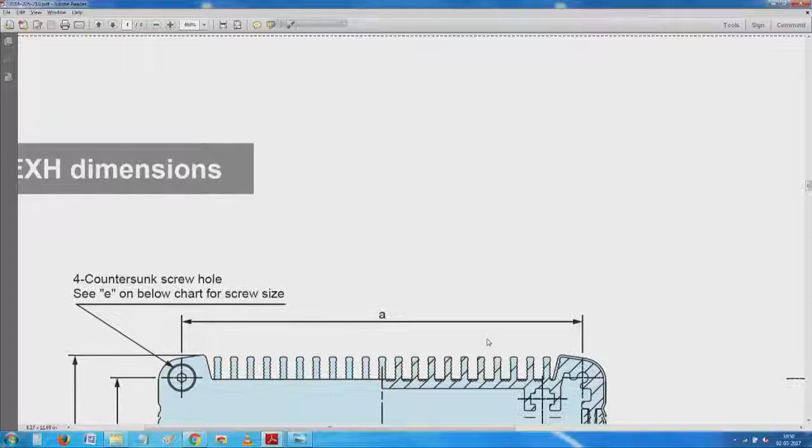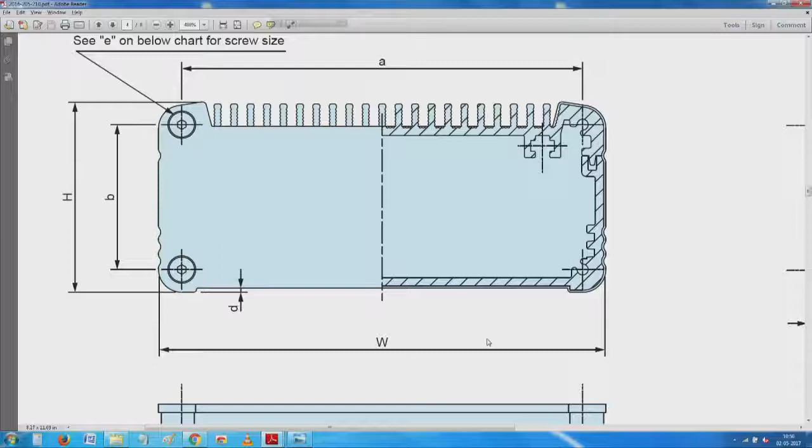If some of you have better alternate things, you can tell me. Once again, coming back to yesterday, I think you should familiarize yourself first with all the dimensions that are possible. A and B in this case refer to the mounting dimensions, so that in case you want to make your own hardware associated with it, you can use it.

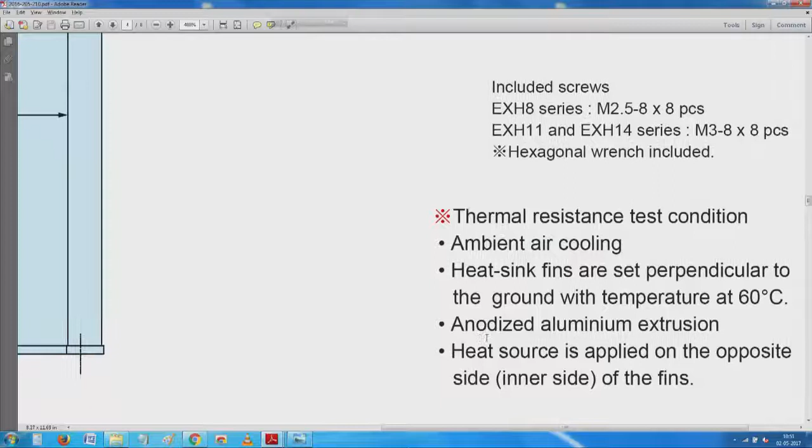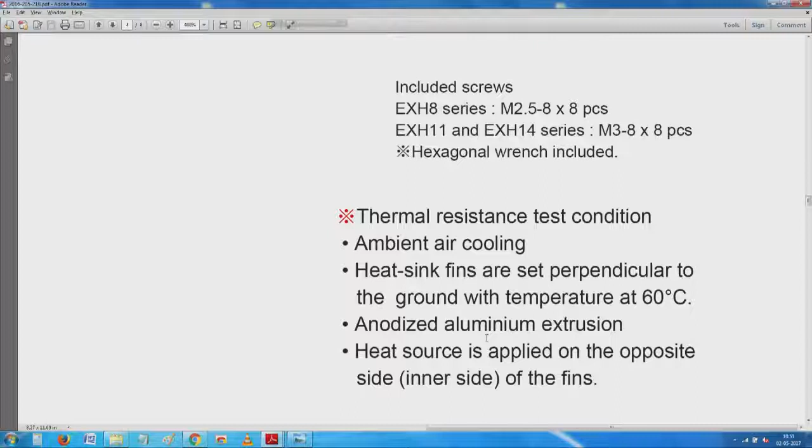You see here, C talks about the clear length of the width of the, I am sorry, in this case let me call it... You have seen this? Well, I won't call it clever. It is not a new improved shampoo which will make your hair grow as you want, but heat source is applied on the opposite side of the fins. But that is not the condition which was shown. You have seen that, no?

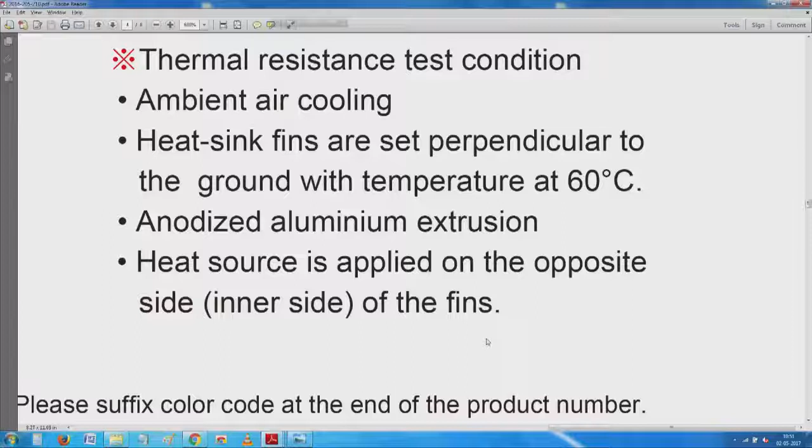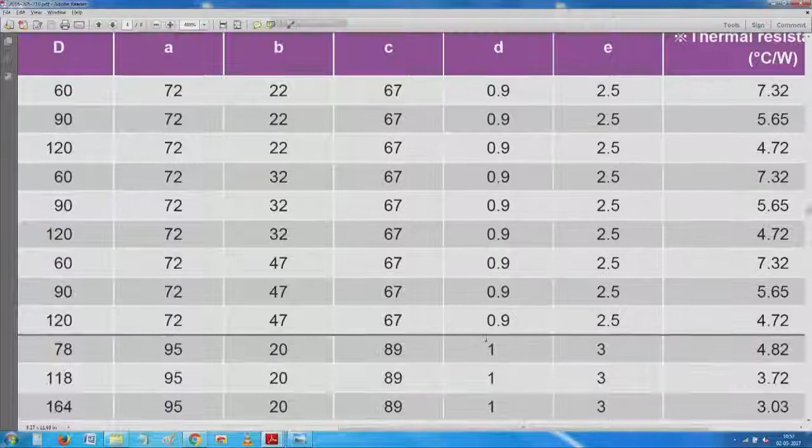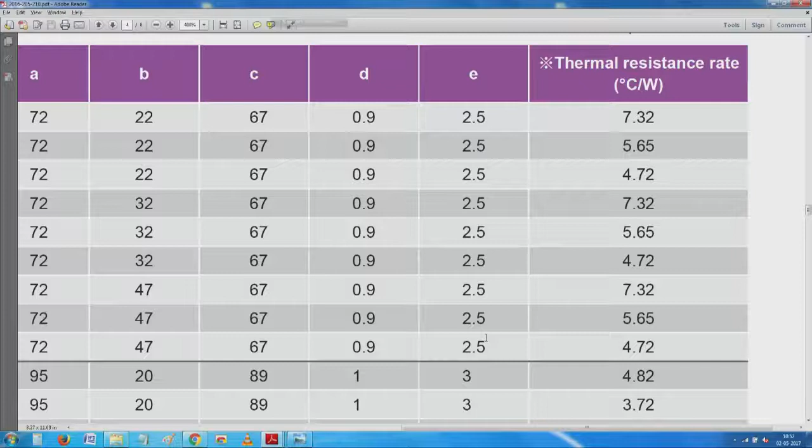This is a condition in which the thermal resistance is included. Let me get back and see. Depending on the length, as the length and width increase, they have given a beautiful thermal resistance rate in degrees centigrade per watt. This is the thing which I was pointing out in the initial stage. If you see that nice beautiful star, thermal resistance test conditions in which they have done this.

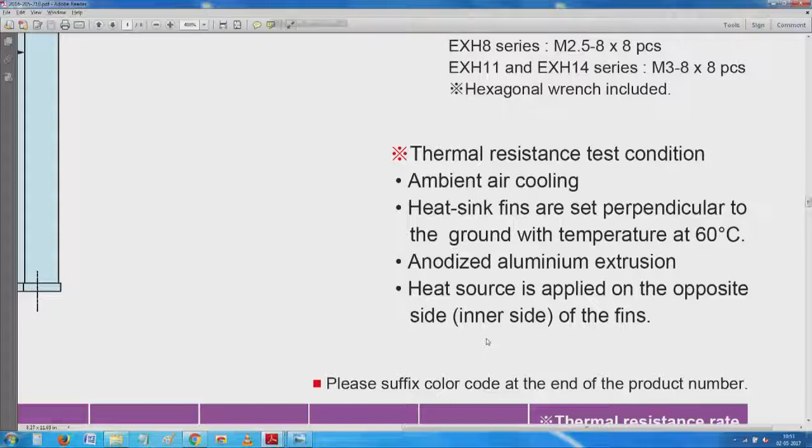So, if there is a way of transferring all the heat to one of the reference surfaces and keeping it at the necessary temperatures, ambient air cooling, heat sinks are set perpendicular to the ground and temperature of 60 degrees centigrade, meaning that whole surface is about 60, and ambient in this case he has not specified, generally they take around 25 degrees. So, in these conditions thermal resistance is in degrees centigrade per watt.

So, if you are to have, let us say, an amplifier which is giving 100 watts, and you multiply it by 7, you end up with 700 degrees. Not necessary, I am sure you know that. Only the thing is, generally the efficiency of the circuit comes into picture. So, typically if you take the worst condition, maybe a loss of around 10% may be there.

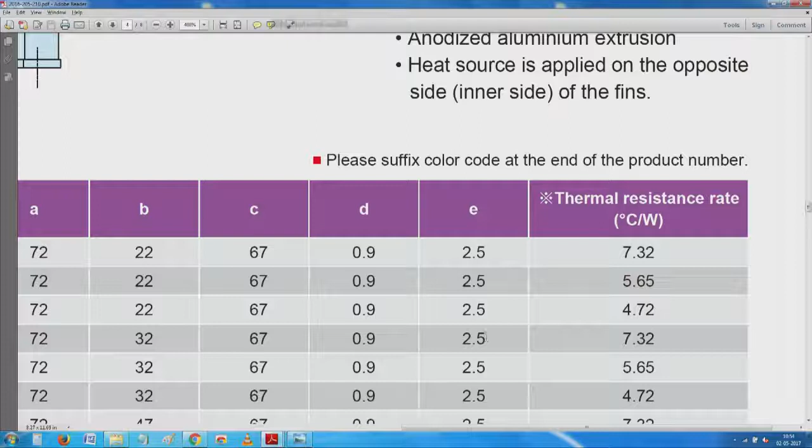The power input minus the power output, the difference is the total power dissipated somewhere or the other. So, multiplying by 10 you may get about a 70 degree rise across the temperature difference and so on. Based on this, you need to work it out, and as it becomes bigger it becomes smaller and smaller.

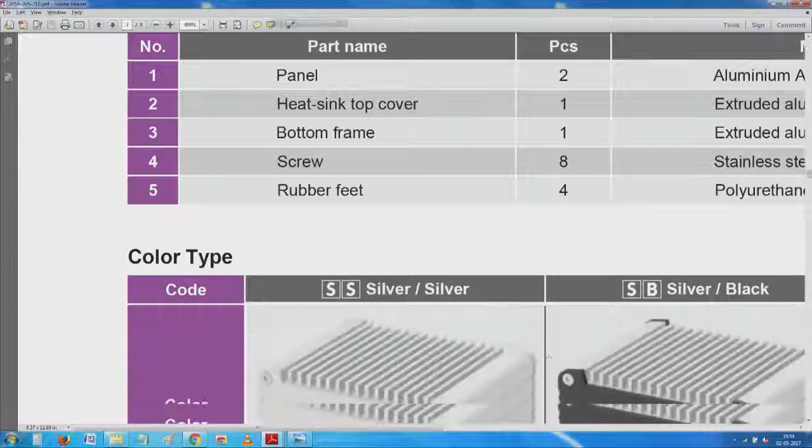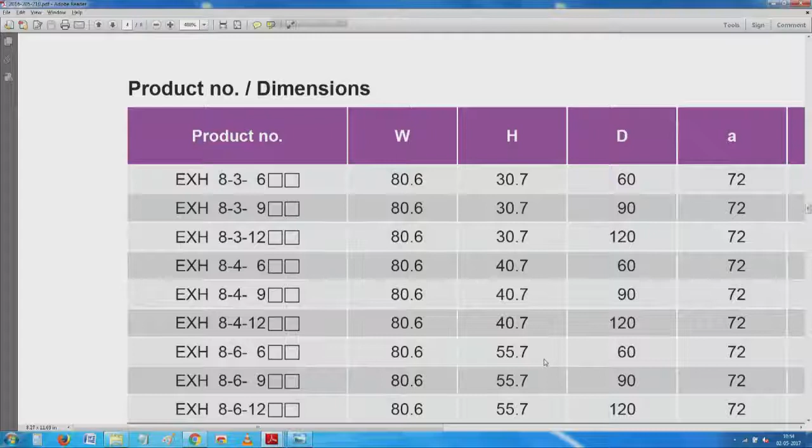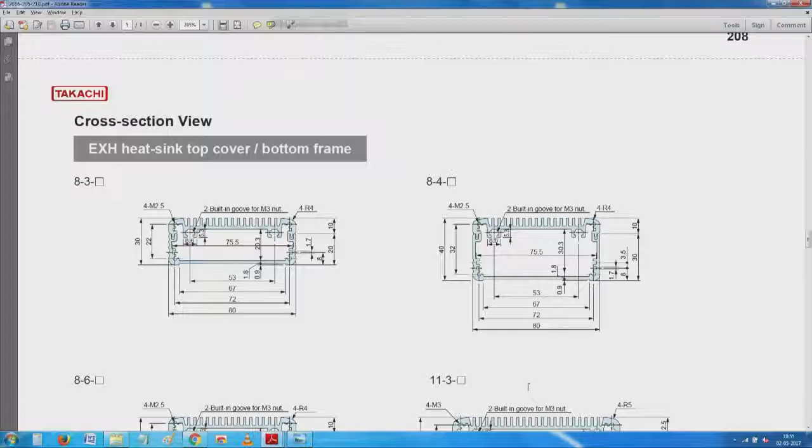So, I will take you in fully, and then you see here we have different colors and then there are dimensions. At the bottom of it, the heat sink conditions are put here. Cross section view is given in quite a bit of detail at this point. I will try to get a little closer and show you all the details. Yeah, I think this may be a better choice.

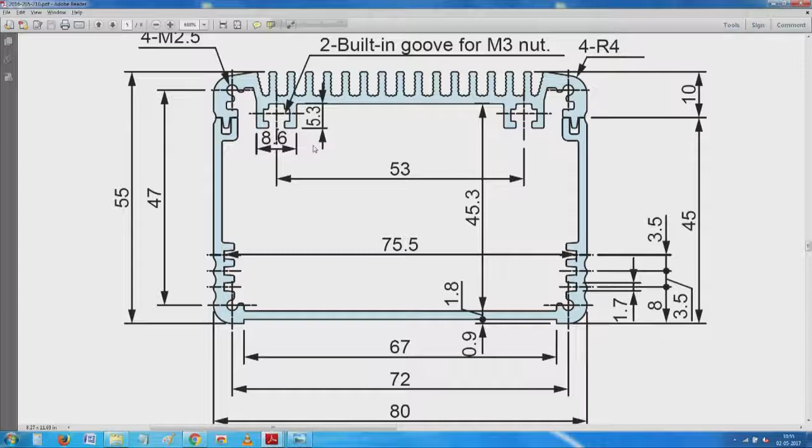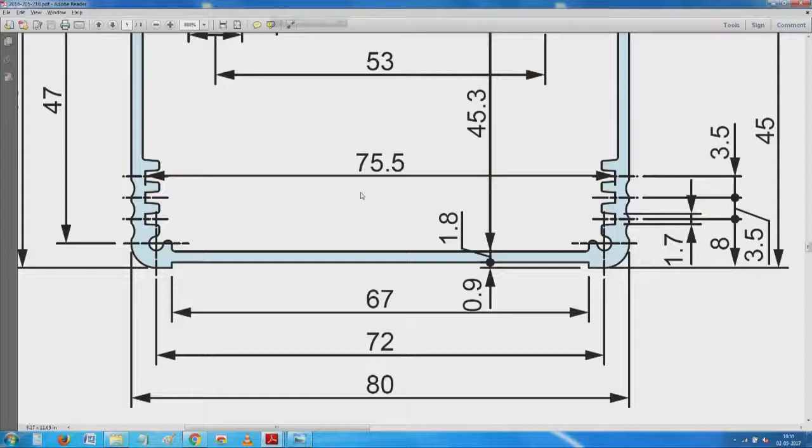You see something. So, we have a lot of details about how to assemble that nut, and at the bottom, about the grooves and where several other things can sit. The printed circuit boards can sit here, or you can have a chassis plate like thing which can sit here. So, lots of details about the grooves, and yesterday if you remember I spoke to you about why the grooves are typically around 1.7 to 1.8 mm.

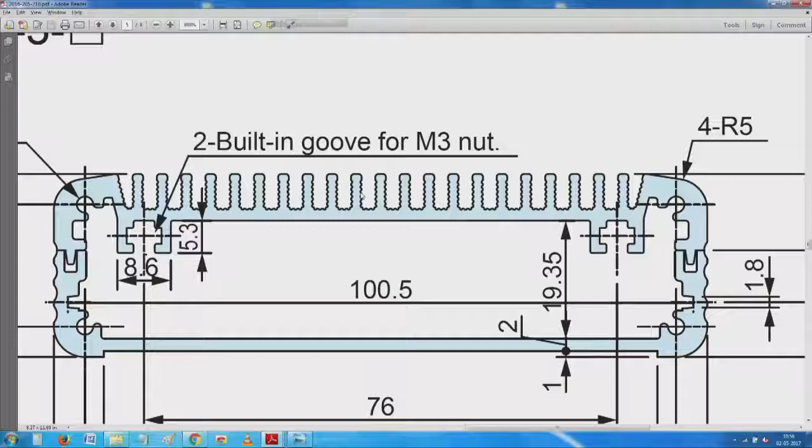They are all related to the average printed circuit board, which after applying I think 1 ounce copper, around 35 microns, I am sorry, I am not very clear about it. Overall it comes to around 1.6 mm, and depending on the length of contact and how well we can assemble it, groove width may be a little more or less, and they have given a small taper also.

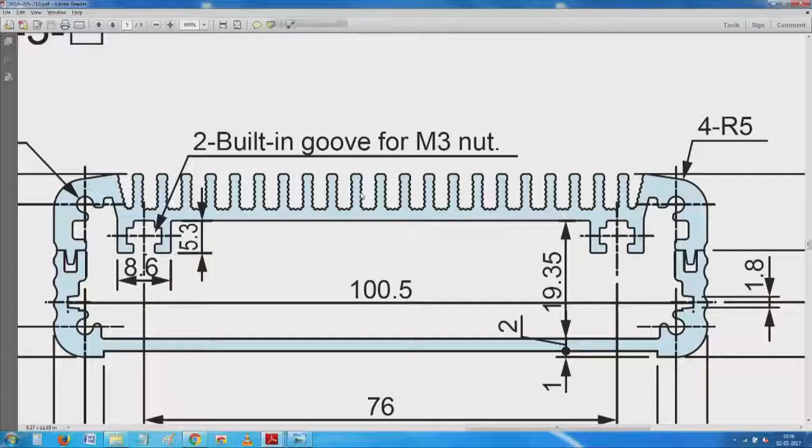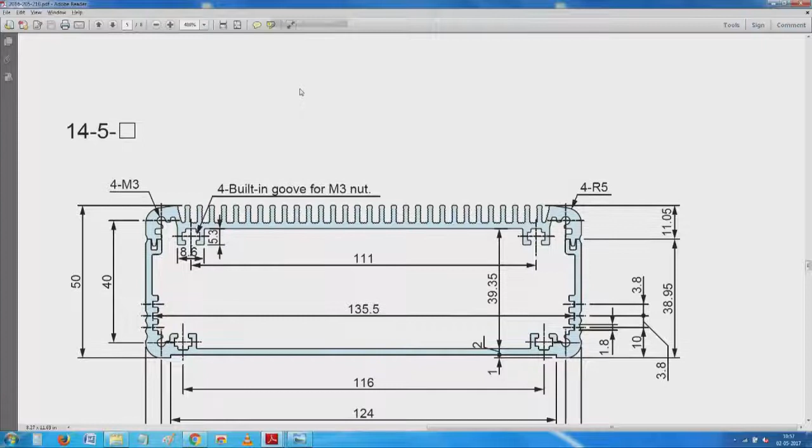While the dimensions are not fully specified here, if you take one piece and measure it based on the tolerances, chances are you will never go wrong. Tolerances are extremely close for this 6063 extrusion. So, these are all a matter of detail about how it goes a little deeper. I will try to go down inside a little to see if I can find more appropriate things.

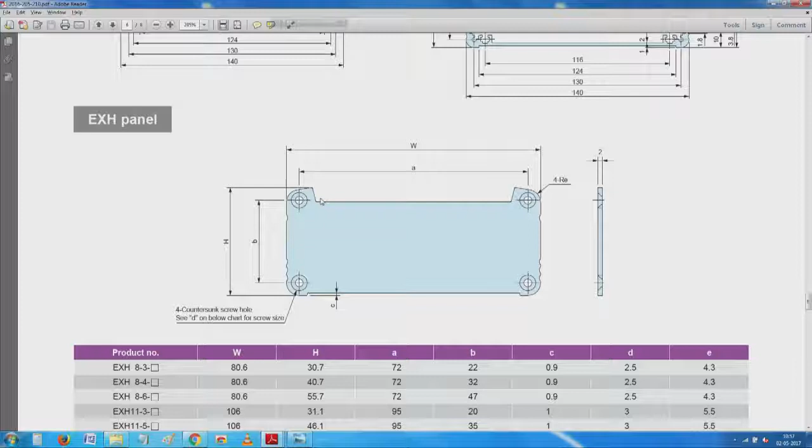See here, many more things are here. One small, very interesting and characteristic thing is that the bottom of this panel fully covers the extrusion there, and then on top of this panel there is a small groove which clears this top surface.

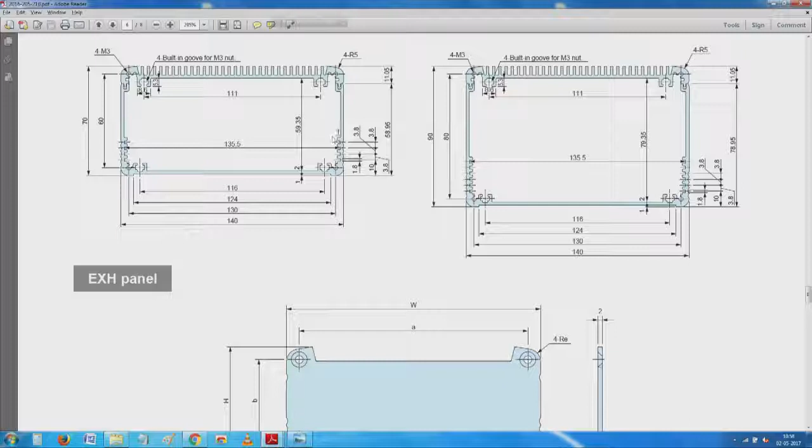And why these distances are all given very clearly is that when you assemble these big screws and all that, all the detail has been very carefully worked out. You have seen that here. You see this 4 into M3. It probably comes pre-tapped. So, you have an advantage here.

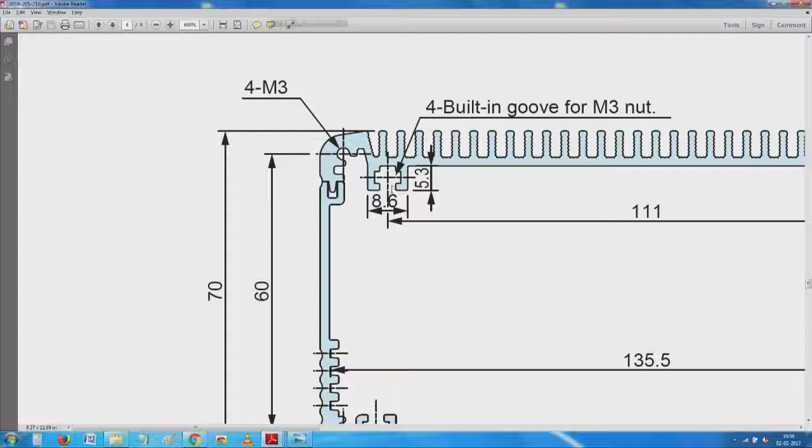It in no way interferes with this, the M3 nut groove where the nut goes inside, and depending on the manufacturing process I told you yesterday, sometimes the nut is kept there, sometimes they use a fixture to align the nut up front. So, you align all the 4 nuts and then after that you peacefully can assemble the PCB. You see here this is very critical.

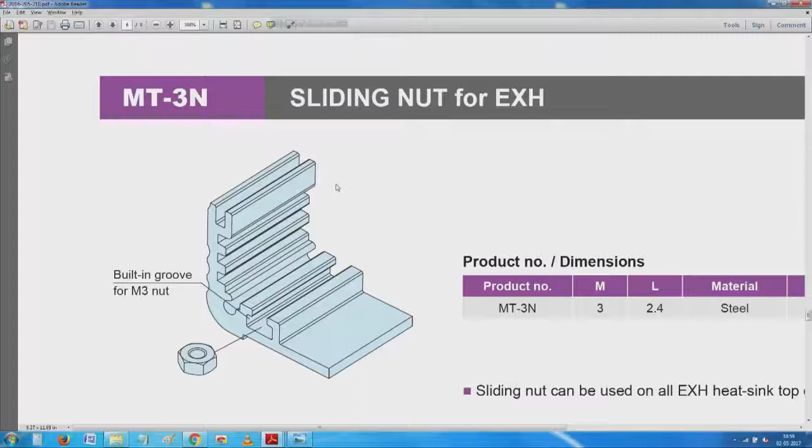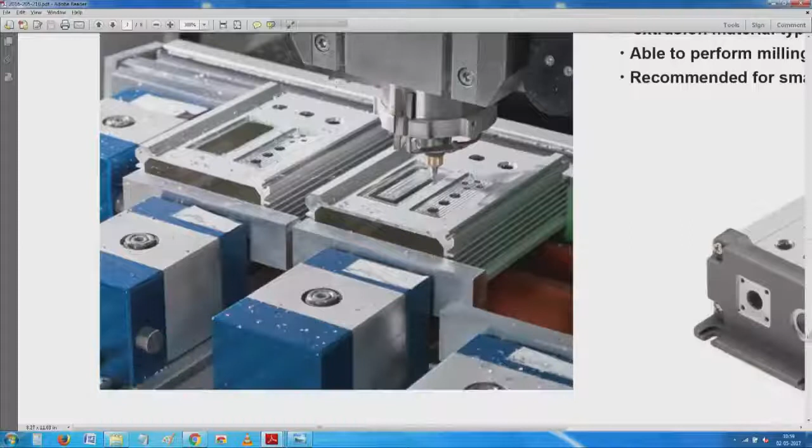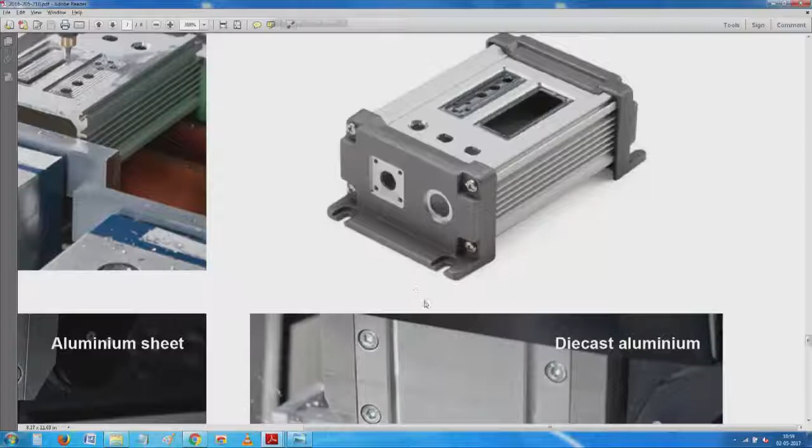This is where, as I said, professional engineering helps in making a sliding nut, a built-in groove; these are all the standard accessories, and this just shows their capability, but it is a little like the drawing which you have seen earlier, except that here it uses heat sinks on the sides. Okay, I will go down further.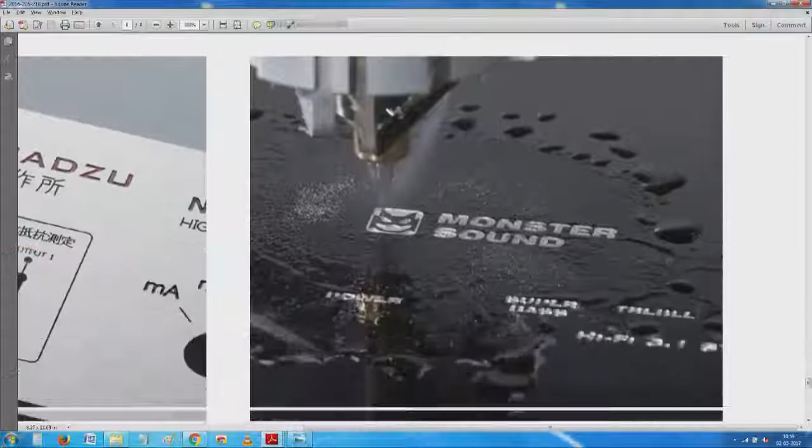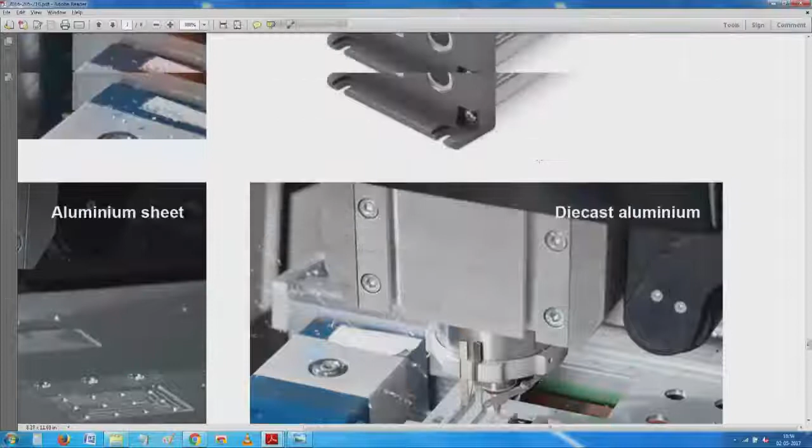This is very similar to the one that you have seen. Most likely it is the same thing that has been there. So, at this point I will leave you back to where we have started, because it will be unnecessarily repeating what I have done. Everything else is about the same, except that the front panel has a clearance here and you have all the professional things. So, if I can have the camera, sir.

This is something which we have attempted using extrusions which are used for our construction. Not the best, I fully agree. In fact it's not at all good. This is not the way to do it, but I am very happy that I attempted it. We have taken one of these extrusions here, normal extrusions, added 2 end plates and made a small provision here

to assemble the screws, that is a small aluminum spacer of the full length has been carefully slit, pushed inside, and that spacer also has provision for us to mount printed circuit boards. So, smoothly we push it from one side, including the printed circuit board, and then you assemble it, it is held tight. And on the other side we have these other openings.

We have made provision here in case we want, we can always have any of the heat dissipating components have a heat bridge like thing which is tapped inside. So, after pushing it in with a little gap, maybe around 0.5 mm sliding, we have a special fastener which goes inside with a small taper, and as we tighten it, it pulls the heat bridge and makes it sit flush across.

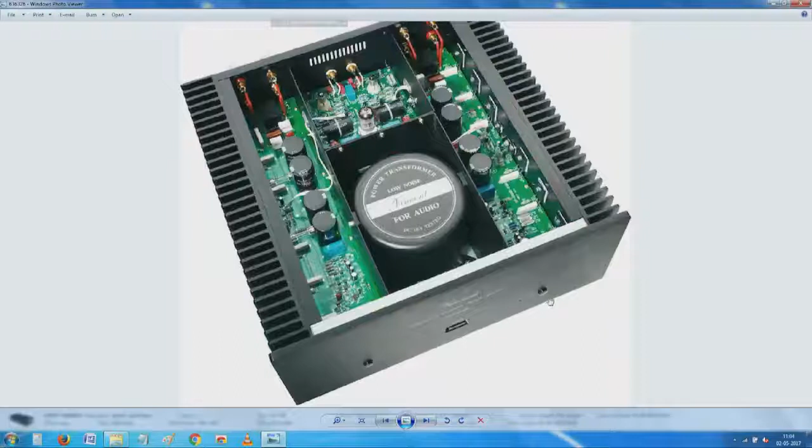The reality of any of these devices is heat loss, and the only way, at least in our case, of making any of these enclosures is you have to deal with two things: one is how to transfer heat across, another is how to keep them sealed.

So imagine a condition where sealing is critical. The best way is to try to make them touch the surface from inside - in my case, I told you how to do it. Alternatively, if you have certain grooves and extrusions inside, you can try to mount all your heat dissipating components inside.

Alternatively, you can have a heat extrusion which has grooves on both directions - inside there are grooves like this, outside there are grooves like this across. Imagine a plate with grooves on both sides, and use that as one of the faces. Then if you recirculate the air properly inside, that is enough for convective heat transfer to the surface and from there to the ambient.

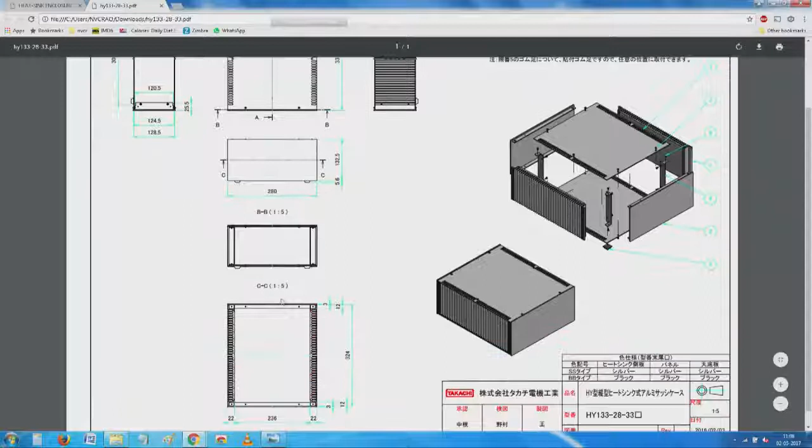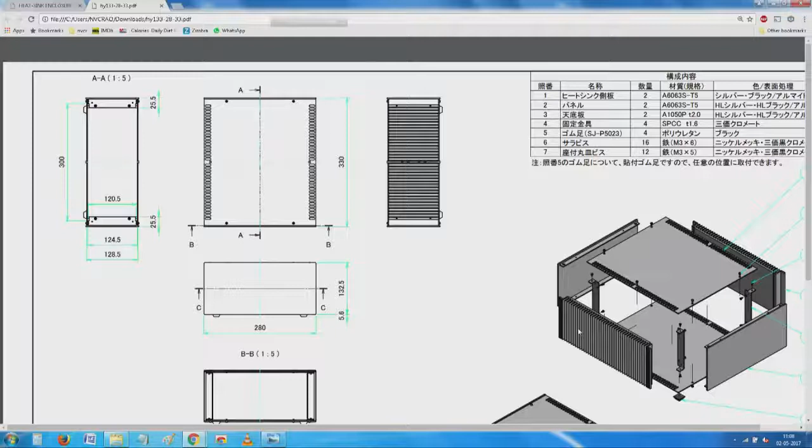Good, we are lucky. You've seen here, this is what I was trying to tell you. You probably need a little bit of, well, I won't call it full engineering skill - I'm sure all of you would have acquired it in the normal course. What I wanted to point out is that you have the top and bottom covers here.

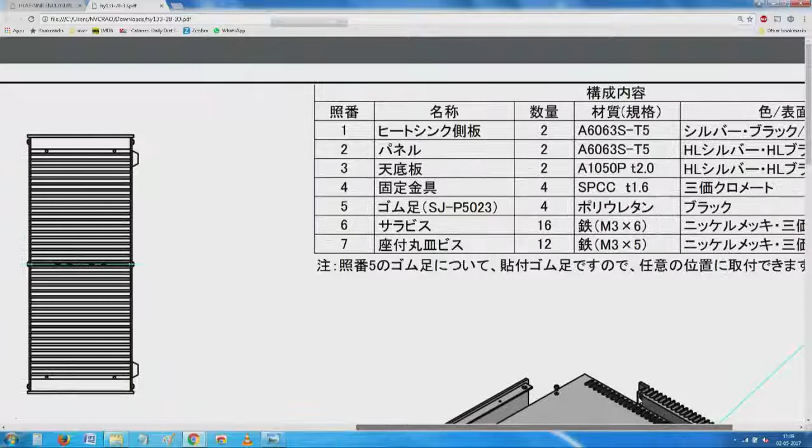Notice something very interesting about it - there are openings on the top cover which correspond to heat sinks here, seen this? If you go down further, this may be a little more self-explanatory. So we have the heat spreader here, then there is a top and bottom cover, and pillars.

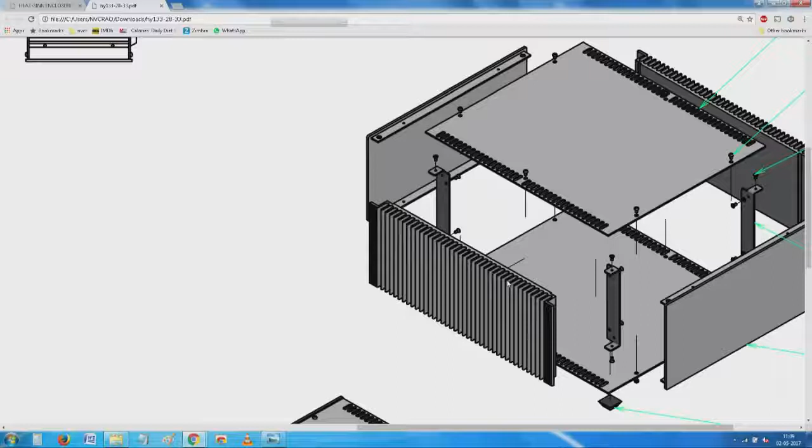I'm not saying you should copy this design, but I'm 100% sure the numbers given are extensively tied to the quality of the material. So copying these dimensions will not take you anywhere - one thing it will guarantee is your equipment will fail, and while IP is another issue, chances of failure are very high. So for the first 2 or 3 units you'd like to have - which, for my breadboard, I'd still call a not-fully-fledged prototype, a technology proving thing - you should start with these enclosures.

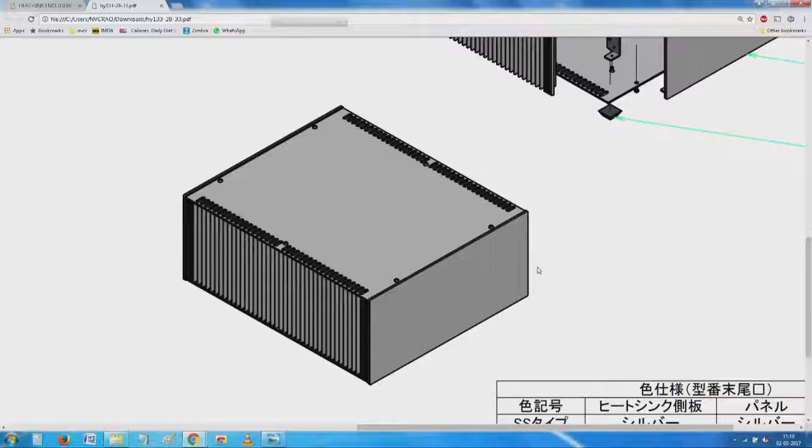Once it is proven and you are sure, then negotiate and get more of them. Do not try to make it yourself, that will be a real problem. Okay, I will just close it at this point. At the same time, you'll notice that two more things have been given here.

I thought if I get a practical chance - I have asked one of my colleagues who works on EDA tools - these dimensions given here, if you work with a package that can understand the original Autodesk DWG format, it's good, 100%. Release is a little issue, but all of them, from R12 to whatever current version, these things open, and most EDA packages allow import of outlines from here.

If that is not allowed, you still have DXF. I will try DWG because I expect it works without much problem.

I hope it is opening. Wait sir, do not show it yet, let it load. After it loads, come, because it takes a little time to load.

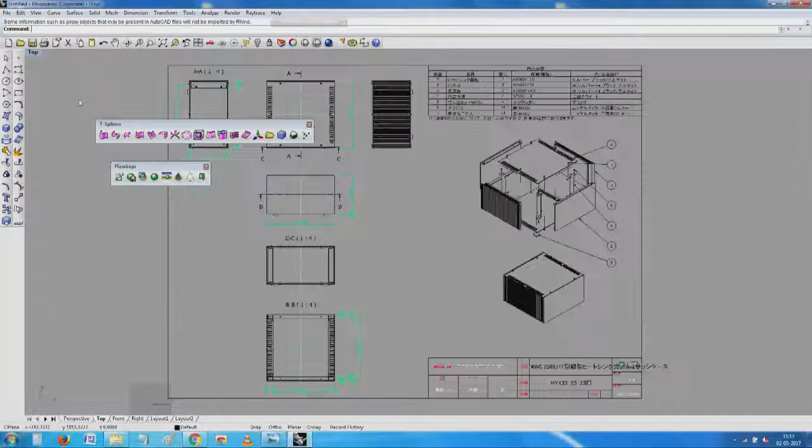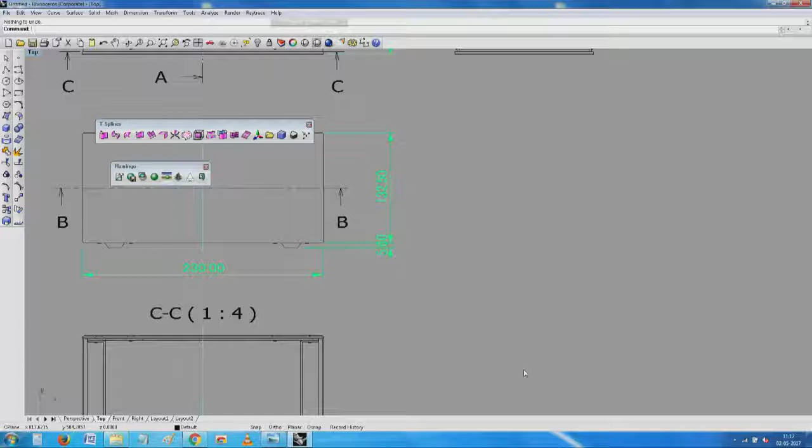So you see here, that same drawing which you have, which was in the PDF format, is now available for us to open with any of the readers. So you have to be a little careful, but you have seen this, even these cross sections and all, no? They have given a beautiful thing saying 1:4. You have to be a little careful about this, but the important thing is you can directly pick outlines, dimensions, everything from the drawings that are supplied in the catalogs.

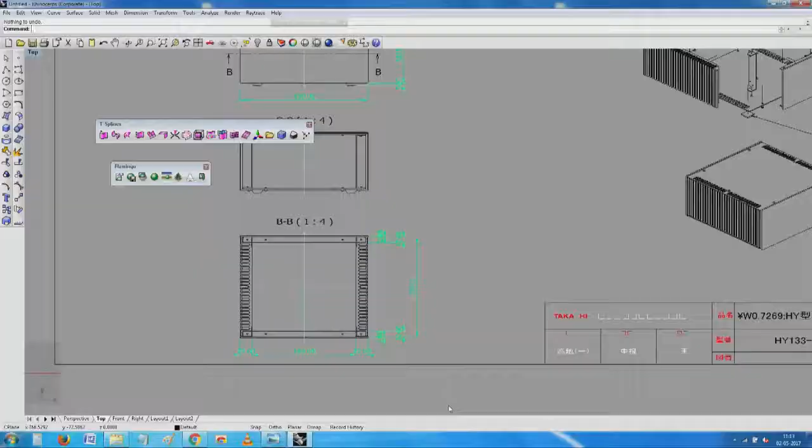So instead of trying to start with an EDA automation, you start with a screen and then pick corner here, corner here, corner here, and then have a schematic capture, and then after that go to place components and make a rat's nest, it will be too late. You can't do much with it.